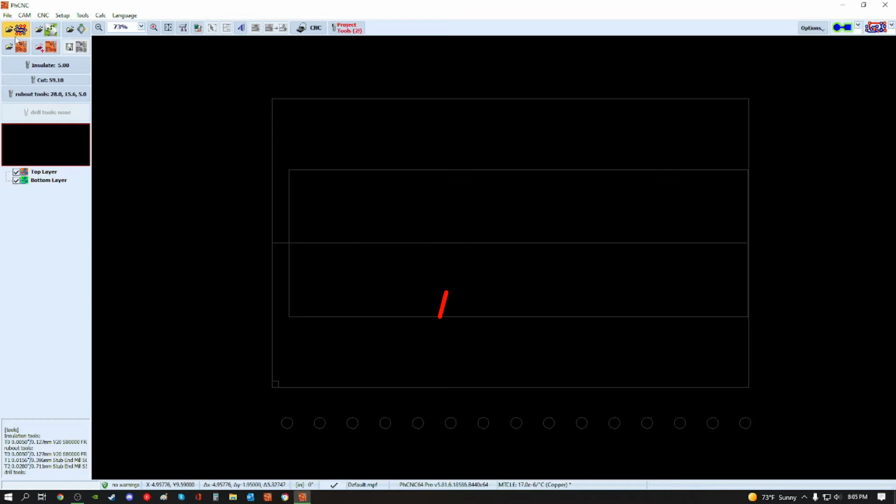We're going to go ahead and import our Gerber file, which is up here at the top left. Once you've found your file's location, we have to import our layers individually. We will start with the bottom layer here. Once you click your bottom layer, you'll select the bottom layer checkbox and then move on to the drill. These drill holes are going to be done on the top.

A window will pop up. You'll hit auto detect, then OK. Next you'll upload your mechanical layer and then the top layer. After this, you're ready to import your Gerber. Up here at the top right is the import button.

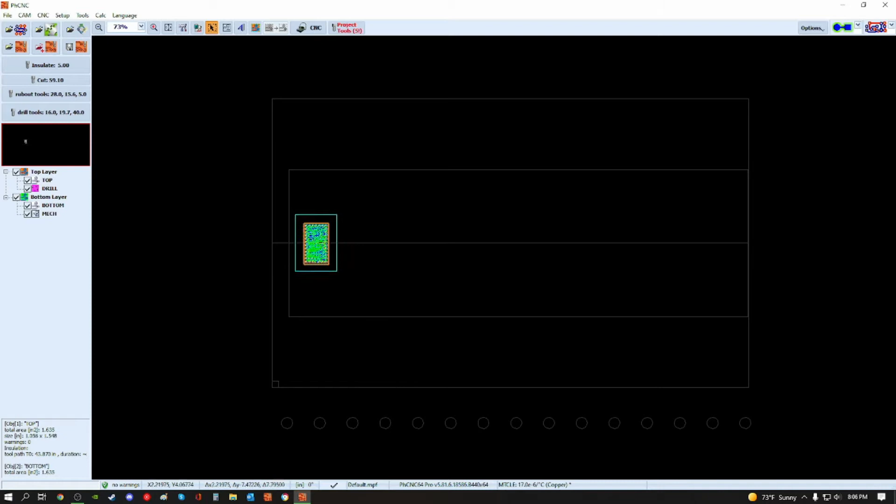After your Gerber is imported, you can click the select move and highlight your object and go ahead and move your project to wherever you'd like to orient it on the table. I'll choose here. After this, we'll go ahead and select the rub out region

by clicking and dragging, outlining our circuit board here. You'll notice this pops up, the process rub out button. Once you've highlighted your circuit board, you'll go ahead and click it. You'll see that it went ahead and processed my rub out for you.

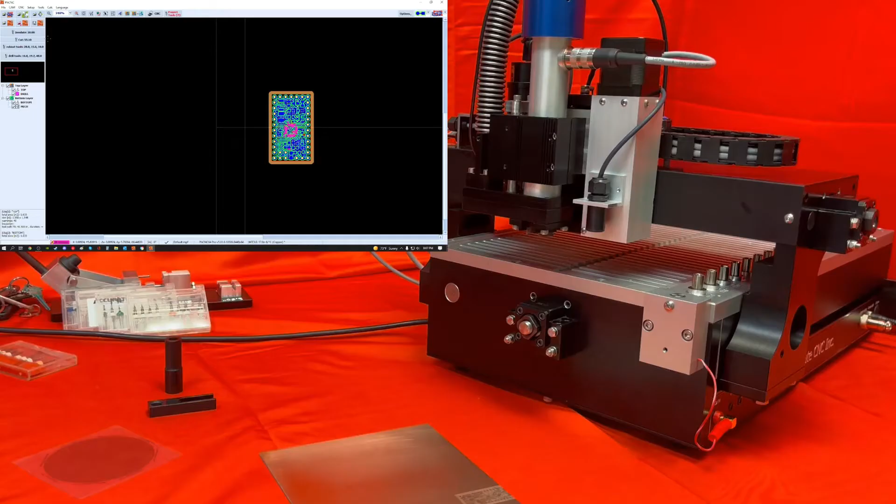For instance, if you have an error in your board, like we'll go ahead and make this tool a little bit too big, you'll see that the pink pops up and it gives you warnings. You can click here and it shows you top and bottom layer. So just keep that in mind if you see pink. Go ahead and change this back to what it was.

Alright. So once you've done that, you're ready to load your tools. You'll go over into CNC mode and go ahead and home your machine.

Alright, after your machine's done doing its little dance and figuring out where it's at, you're ready to load your tools. You can go ahead and open up your ATC control panel and do a spindle and tool holder check. It'll verify that there's no tool in the spindle and no tool in any of the tool holders.

Alright, let's go ahead and load the tool. I went ahead and made a little kit for the circuit board that I'm going to be running here.

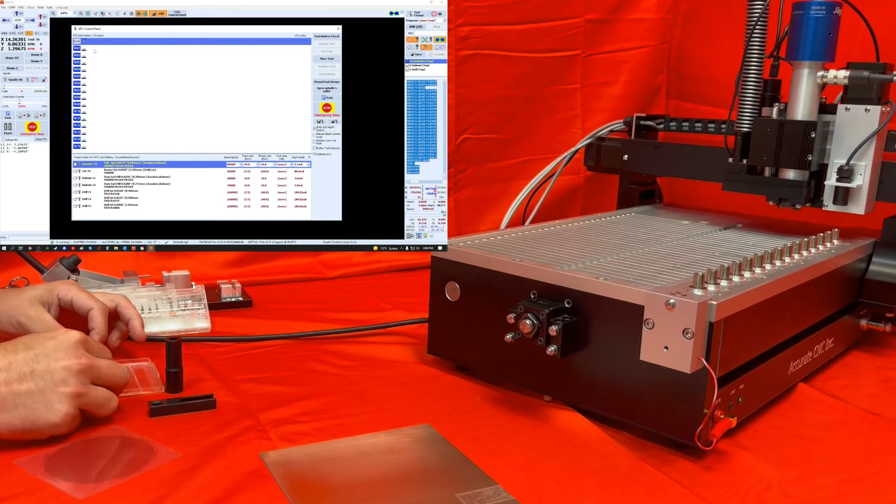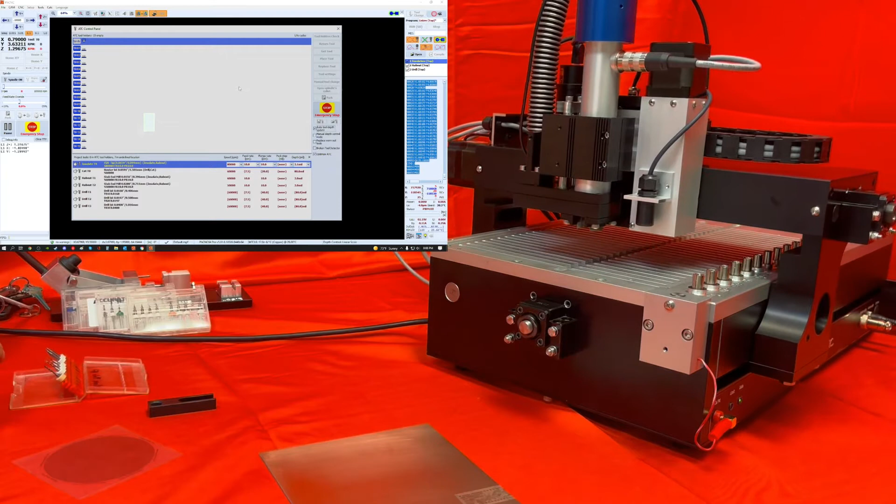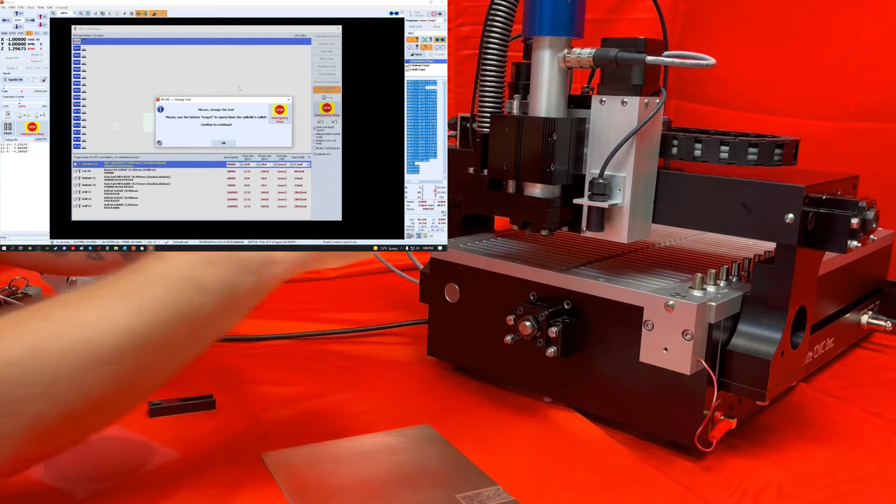Once you have the tool up in there, you want to firmly have pressure upward and then release the spindle, or release the calibration pad button. You're then ready to hit OK on your program.

Alright, it'll measure the tool's tip, and you'll see that it thinks it's a router bit. We'll go ahead and place the tool in tool holder number 1. And then we're ready to define the tool.

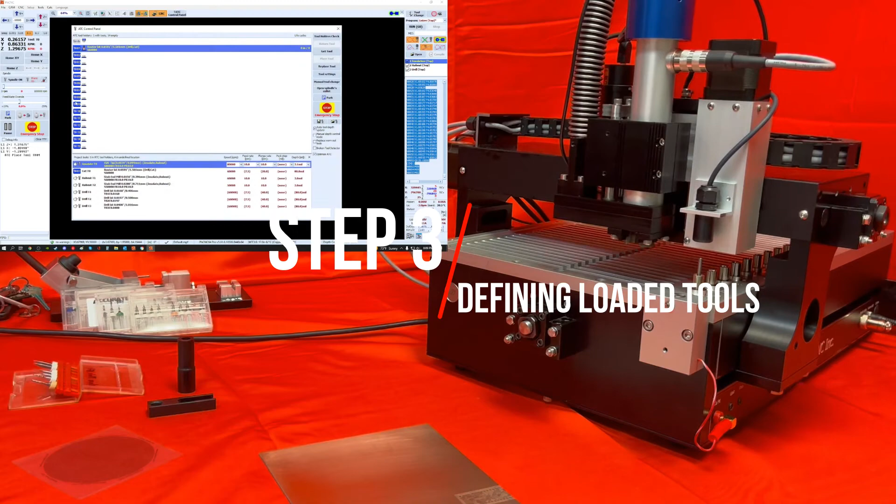What you'll do there is you'll double click the tool in the tool holder, and you'll see here on my tool table that I have a history of tools that I've already entered in the machine. Luckily I can just select the one that I have and I'm done. But if not, you'll see here is an add button.

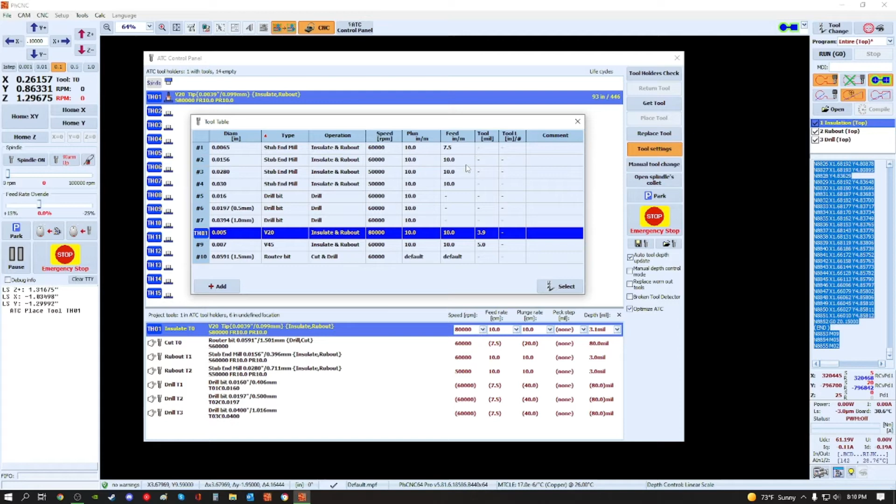You'll go ahead and click add and then you'll define your tool, your speeds, your plunge and feed rate, and everything else, and then you'll hit select. But I will go ahead and move on and load my 7 tools, and I'll be back with you.

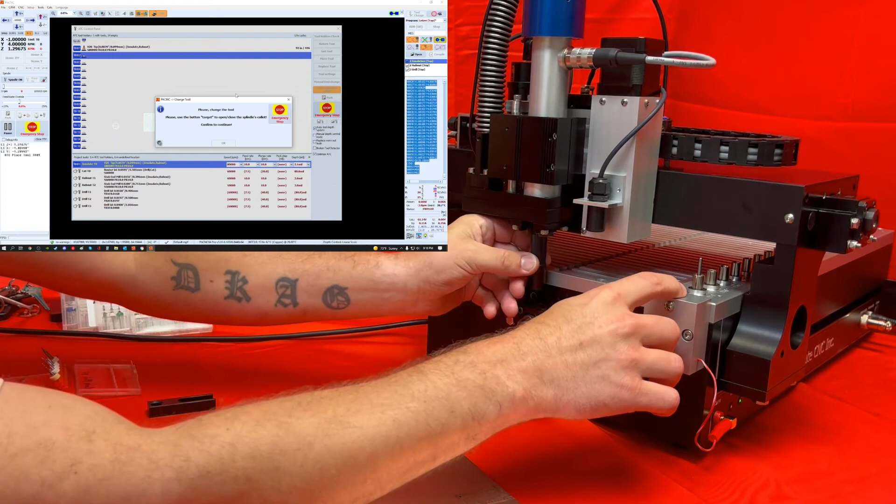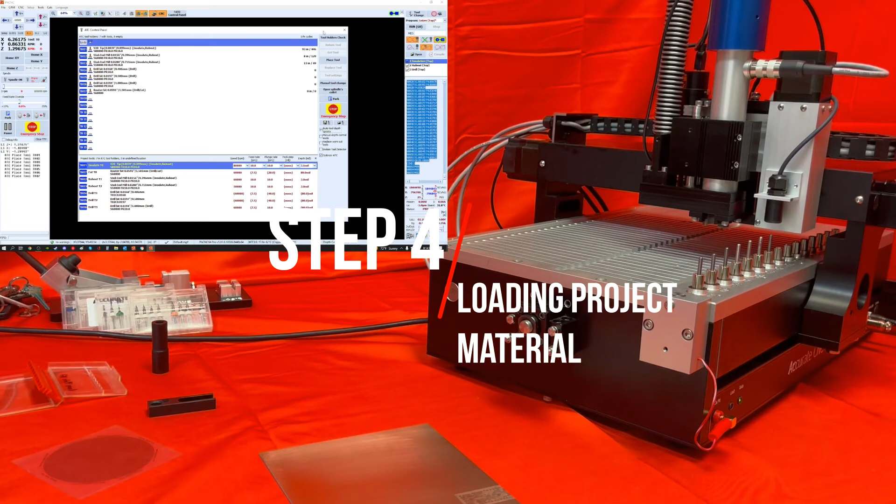Alright, you'll see here that I have all my tools set up and I'm ready to machine my board. Let's go ahead and put our material on the table.

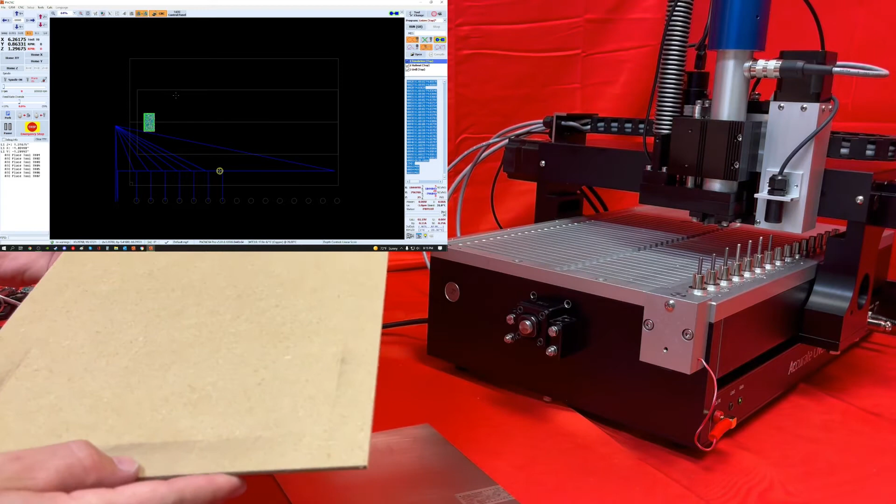Here we have some air permeable MDF. This is what I recommend that you use. That way you don't have to drill any holes. And this is a piece of FR4, just scrap that we have here around the shop. That'll be perfect for this.

So after you've placed your material on the tabletop, go ahead and turn on your vacuum generator. It'll pull a nice vacuum for you, as you can see. All right. Once you've done that, go ahead and spindle chase to your project. And then go ahead and home Z.

Alright, once you've done that, you're simply ready to machine after you make sure that entire top is selected.

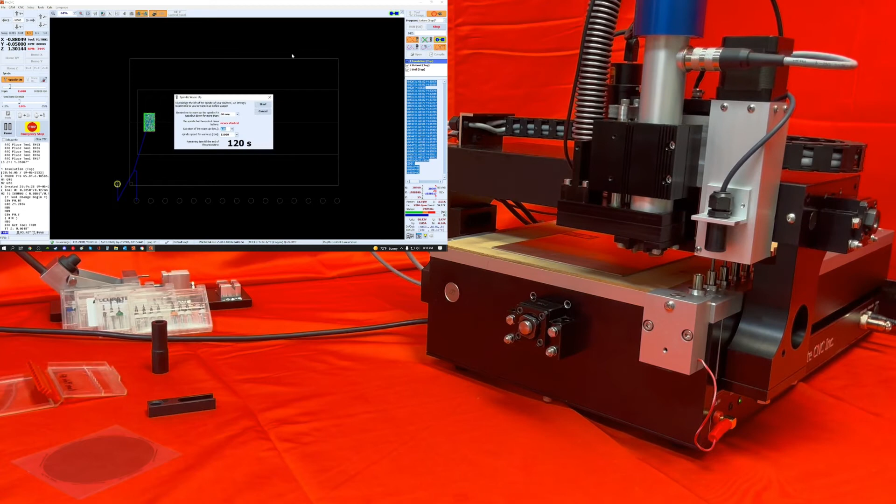So we've machined the top of the board now, and we're going to go ahead and flip it and move on to the bottom. Before we do though, go ahead and up here at the top right, we're going to select entire bottom now.

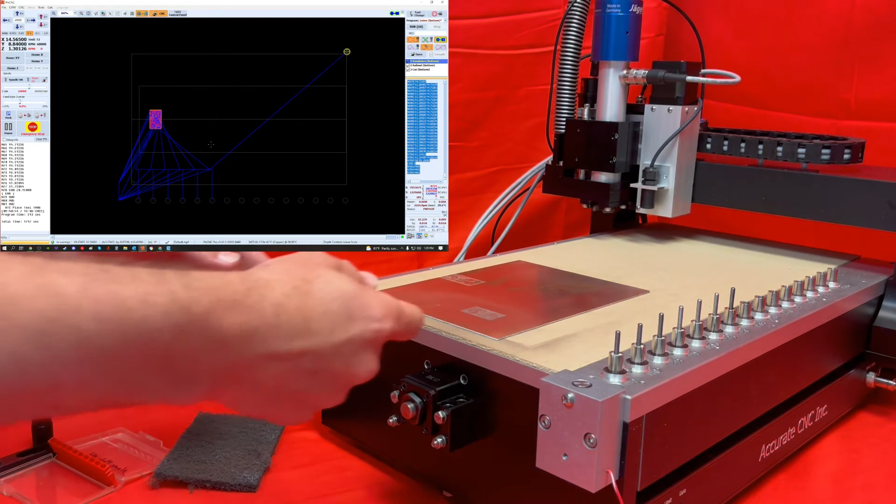Alright, once we've done that, we'll go over to our machine. You will then take your material, and I like to just get up under the corner of it with my fingernail so I don't have to turn my vacuum off. Now I'll kind of place it pretty close to where I was already machining at. This is just a little trick I like to use, that way it's easier to find.

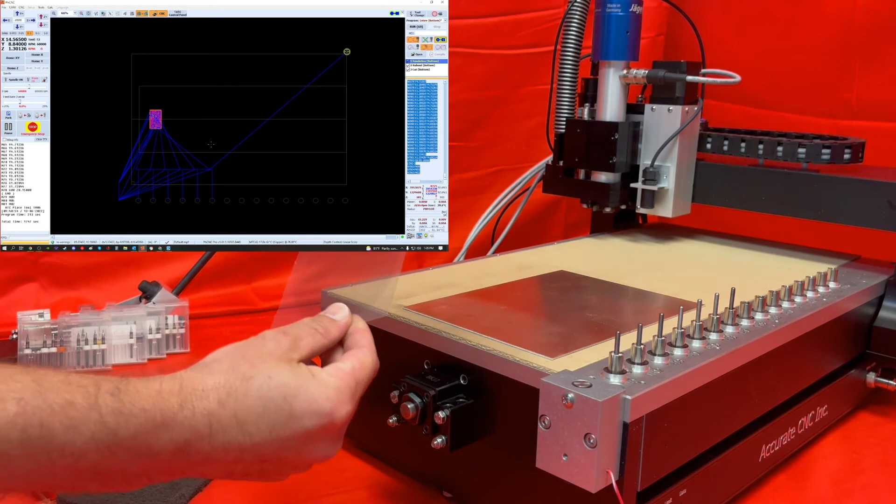You'll take your Scotch-Brite pad, give it a quick little polish here, just to deburr the holes, and then you'll take your photo tool and place it over a nice group of holes so it's easy to find.

We'll go into camera chase mode, and we will control right click over to the area where we were machining already, and then do a control space bar to autofocus.

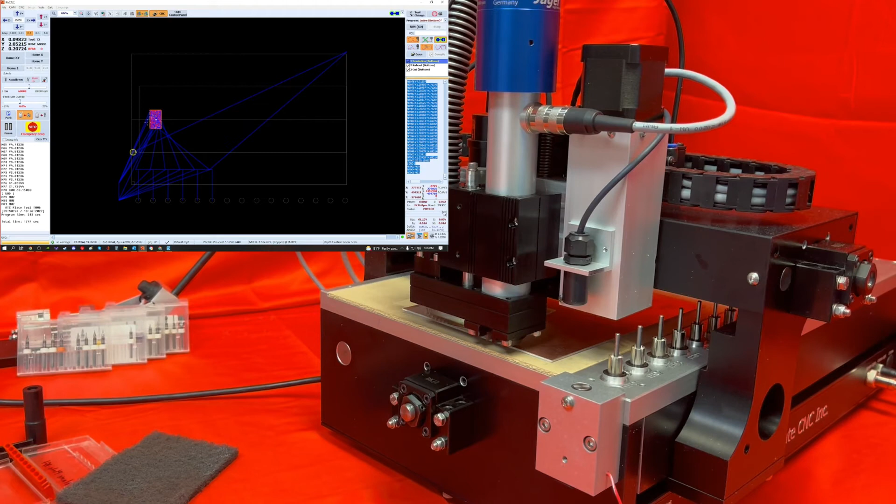Alright, after our autofocus is done, you can go ahead and move in and find the center of your photo tool. Remove it. Once you've got yourself a nice little group of holes, get some that are, oh, here we go. These are a little closer together.

You'll right click, turn on fiducial registration mode, right click again, and turn on auto hole detector, and then right click one more time, go to auto fiducial registration, and then execute auto fiducial registration.

See, it chases around and finds all the holes. Lines everything up nice. This one we got 100% accuracy, or 100% quality, sorry. And it looks like it went down to 93%, which is pretty good.

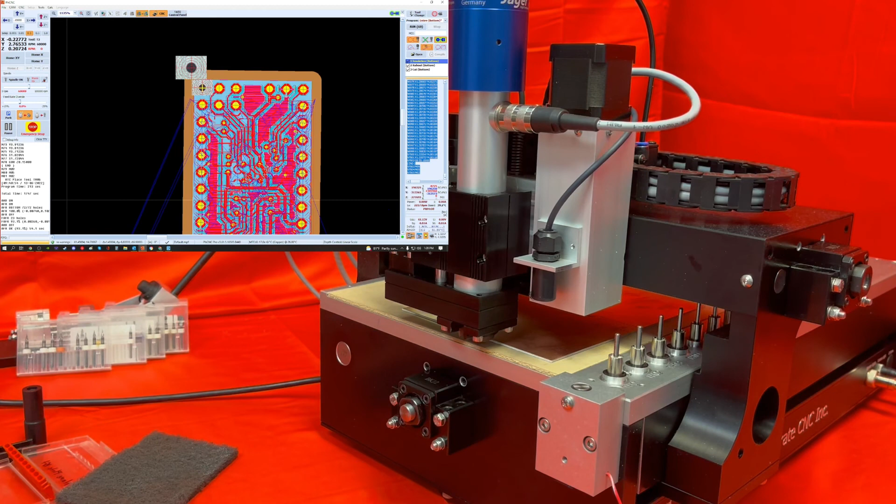So we will just chase around to our holes, see that our holes are in the correct place. Looks like they're pretty darn good. After that's done, you're ready to hit run.

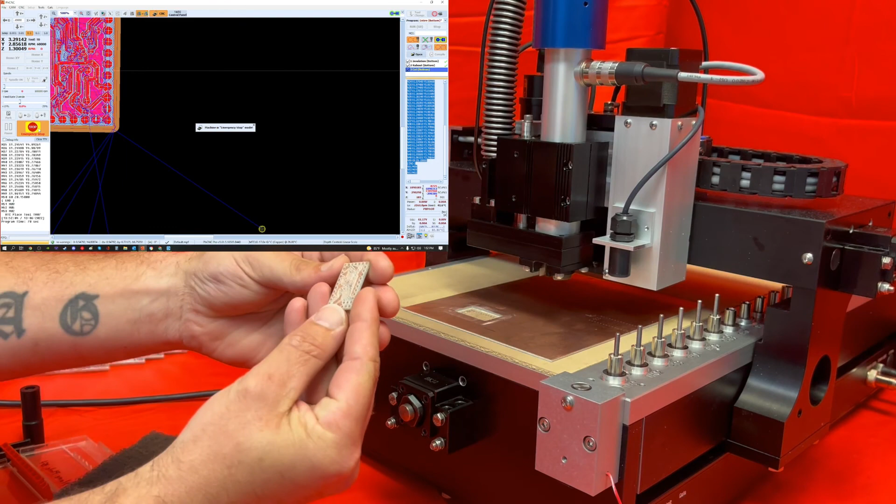There you go, just like that. You have a double-sided circuit board.